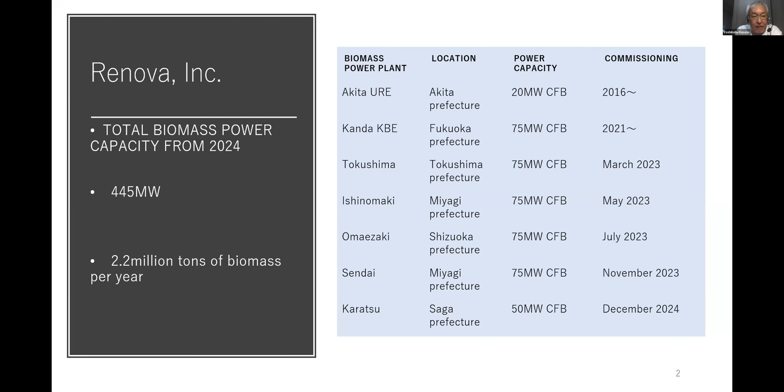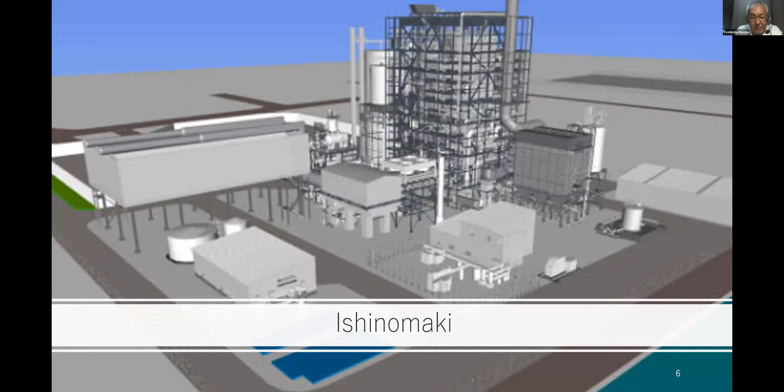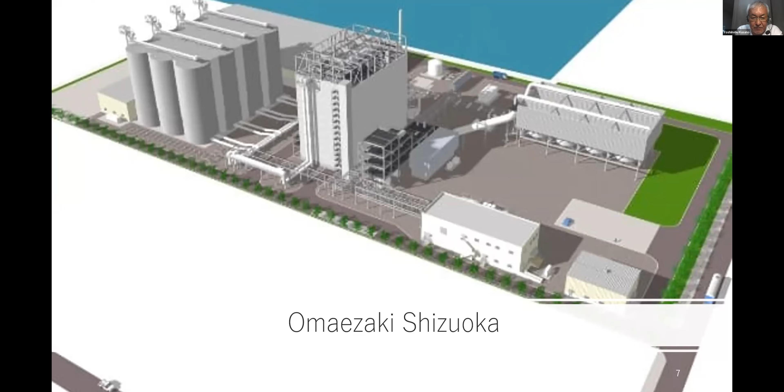This is the picture of Akita. This is the picture of Kanda, 75 megawatts. Tokushima is coming, 75 megawatts, next year. Ishinomaki is coming, 75 megawatts, in 2023, next year. Omaezaki is also coming in Shizuoka Prefecture, 75 megawatts, next year. Sendai is also coming in 2023, 75 megawatts. And Karatsu, this will come at the end of 2024, 50 megawatts. So all these are Renova's dedicated power plants in Japan.

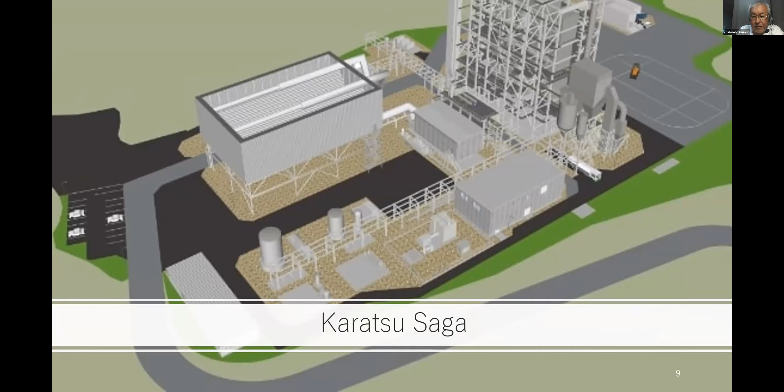Now let's go back to the subject: biomass as a substitute for coal, opportunity in Asia. My conclusion is that opportunity is there. Coal must be replaced as soon as possible. Asia is not only the biomass consuming market, but also the biomass supplying region.

My country, Japan, is a good example. First of all, we have a population of 122 million people. This is about 1/3 of Greater Europe. Based on this, we have a potential of consuming 10 million tons of biomass per year within 2 to 3 years' time. In fact, the consumption of biomass is rapidly growing.

We have two serious issues: decarbonizing power generation to renewable, and decarbonizing heavy industry to biomass. Regarding decarbonizing power generation, we have already done introducing biomass fuel to a satisfactory level. Yet, power generation has other options to go for - solar PV and wind - without consuming biomass.

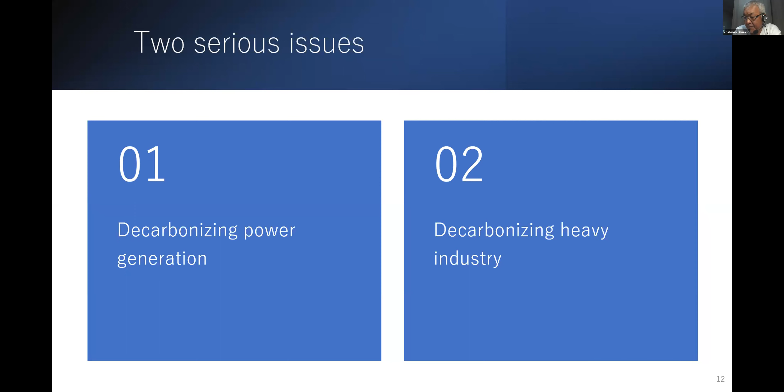Decarbonizing heavy industry to biomass has just started and needs to be focused on, because they have no other options than to go for biomass. The heavy industry uses coal as a fuel; they can only go for biomass if decarbonization is needed. Solar PV and wind power cannot generate heat.

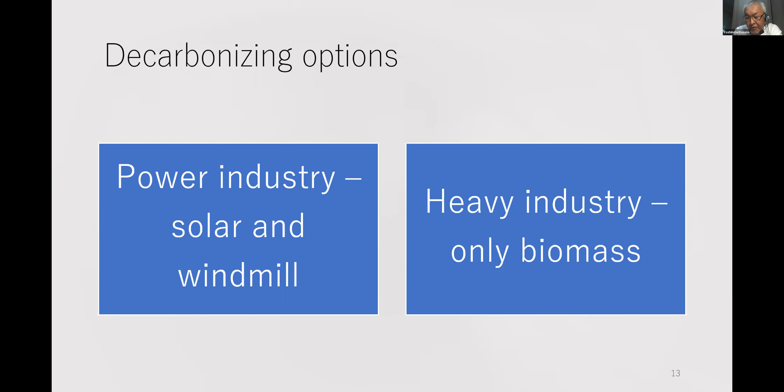Regarding coal consumption, the steel mill is a big user of coal other than power generation. Similar to Europe, they need biomass, and particularly they need carbonized or torrefied biomass, because white pellet or non-treated biomass are too low in calorific value and too soft in some usage, such as a replacement of cokes in the blast furnace process.

Therefore, torrefied biomass or torrefaction technologies are a must to cope with demand from the heavy industry.

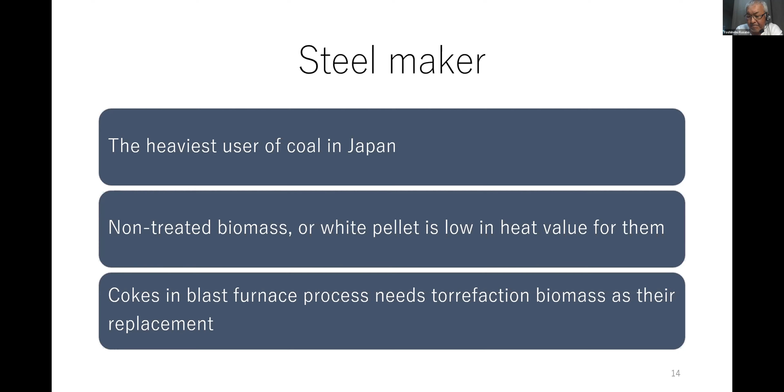Japan is still a heavy user of coal. A revised energy mix announced in 2021 says 19% of power energy source is coal. This is still an ambitious target set by the Japanese government for 2030. We have no declaration of stopping coal usage, while decarbonization is declared by 2050.

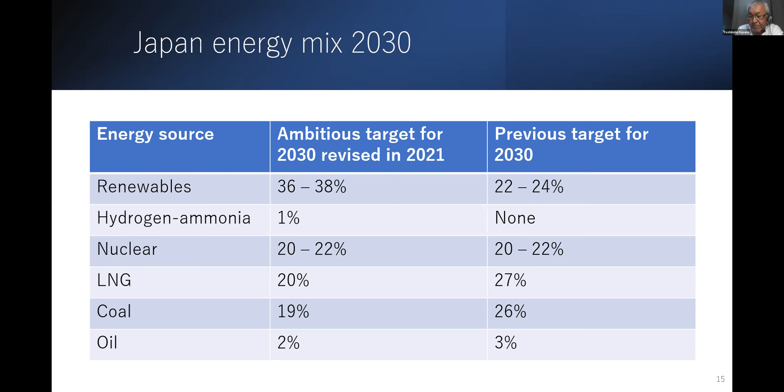In order to be a part of the international market, all industries using coal will make their best effort to reduce coal consumption toward the year 2050. There is an international commitment by the government of a 46% reduction of coal consumption by the year 2030. This becomes the immediate and serious target of the heavy coal user.

So much so, I can say that heavy industry or general industries are much more serious than power generating sectors in terms of renewable energy introduction.

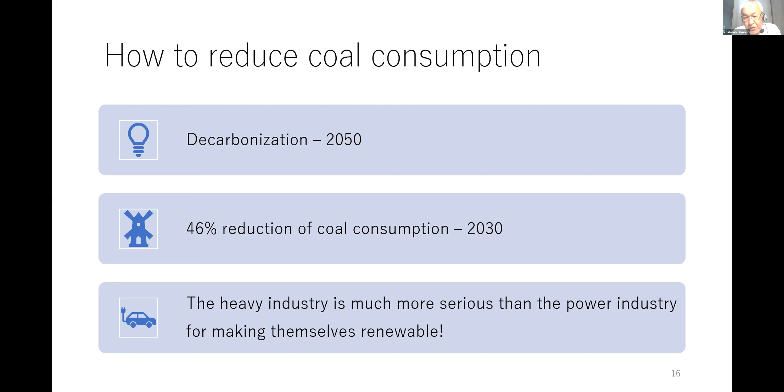Torrefaction technology on biomass needs to be established as quickly as possible. My understanding is that none of the commercial-scale torrefied biomass production facilities are actively running. At least for the last 10 years, several torrefaction technologies have been tested in trial commercial productions, but none of them was successful, as far as I heard.

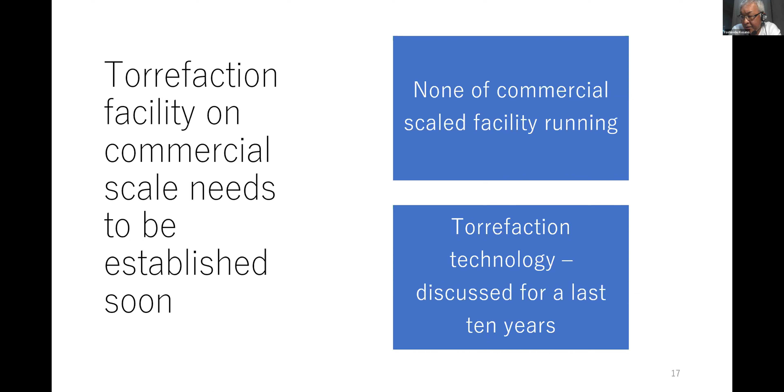Some technology did okay in trial production, but failed to have the same result on commercial scale. They are not successful in commercial scale production and cost competitiveness, compared with white pellet or non-treated biomass. Because of this failure, torrefied biomass is not so popular in Europe, if my understanding is correct.

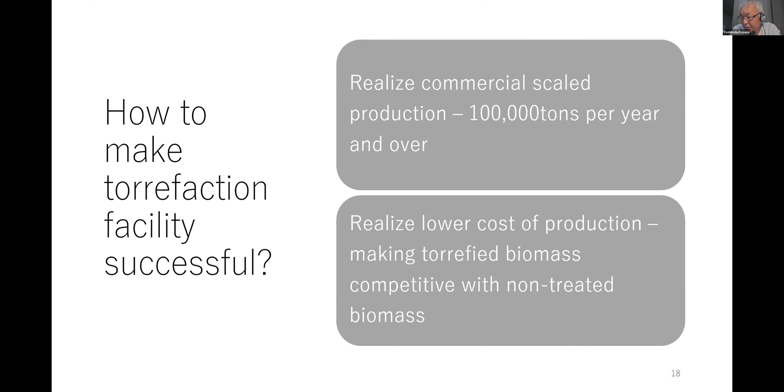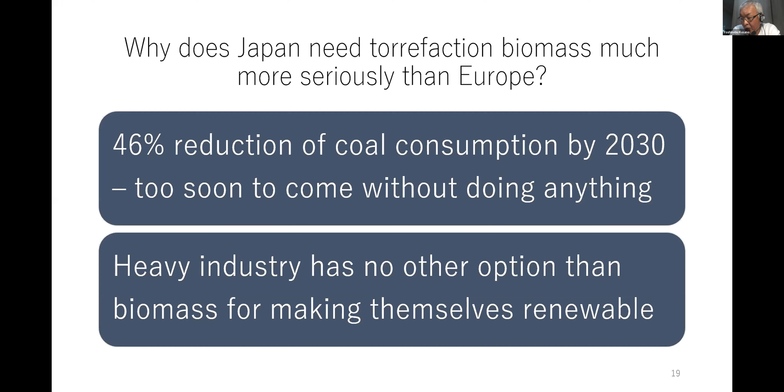However, we are different. We need torrefied biomass much more seriously than Europe. There are two reasons: one, the 46% reduction of coal consumption by 2030, which comes within 7 years' time; number two, there is no other option than going for biomass.

Hydrogen and ammonia got big support from the government, but they are not tomorrow's renewables — maybe 5 to 7 years later. Japan needs biomass replacing coal tomorrow. Biomass should be an intermediate and ideal solution before hydrogen and ammonia come.

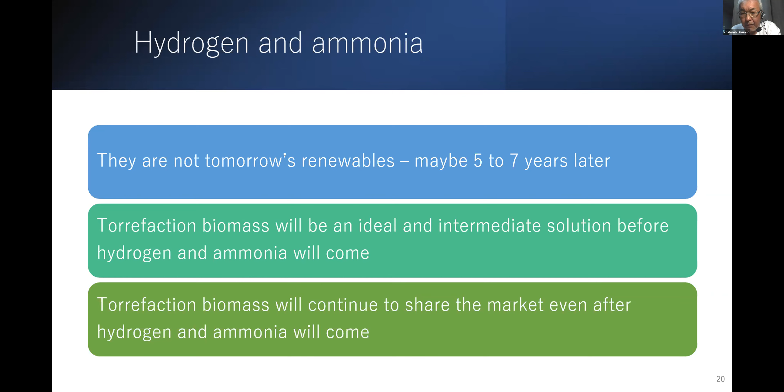Lastly, I will touch on the subject of whether there is biomass available in enough volume to support both industries, power industry and heavy industry. My answer is yes, but we shouldn't stick to wood biomass.

Agricultural waste, such as flax straw, sugarcane bagasse, corn stalks, must be considered. Energy crops, such as sorghum, switchgrass, miscanthus, elephant grass, must be considered.

Some feedstock contains strong chemicals, such as sodium and potassium, with a high percentage of content. The boiler engineers do not want to use such feedstock as it will damage the boiler. But with some technologies, it will turn out to be useful biomass in the future.

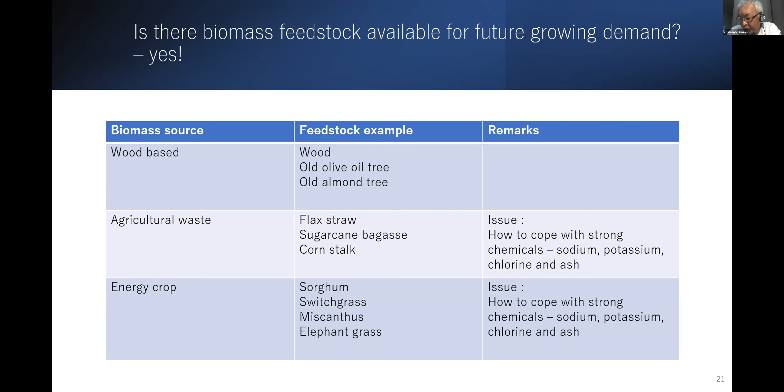This is the end of my presentation. Thank you very much for hearing me. Thank you.

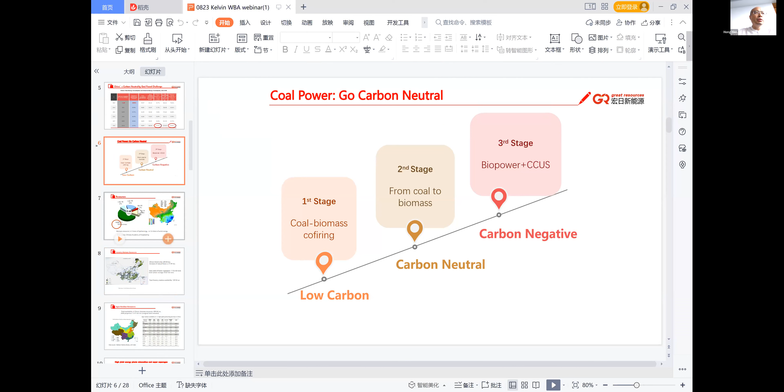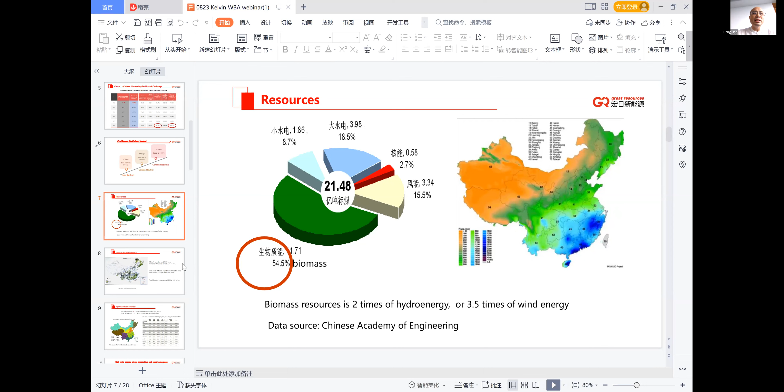When we talk about biomass, first we think about forest residue, forest biomass resources. This is the map showing forest biomass resources in China, and in total we can find as much as more than 8 billion tons of energy.

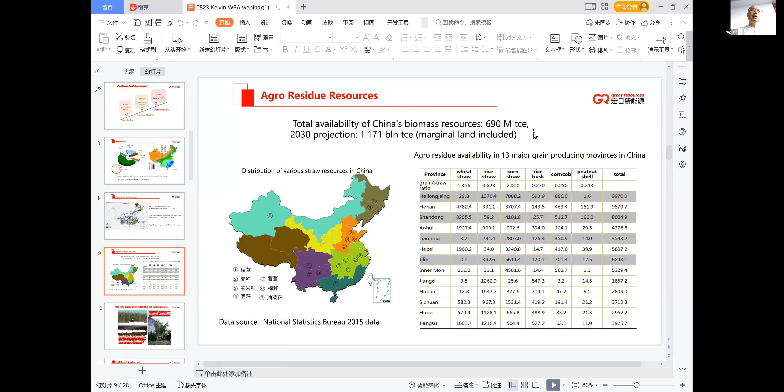This map shows agri-waste in China, including corn, rice, wheat, and any kind of byproducts we can find from agricultural waste - as much as 690 million tons of coal equivalent every year. We also find some places we can plant energy crops, for example elephant grass and miscanthus and so on. So in China, we have enough biomass energy resources we can find.

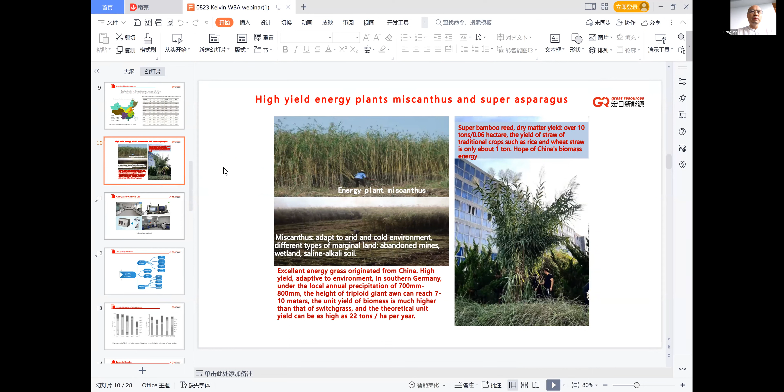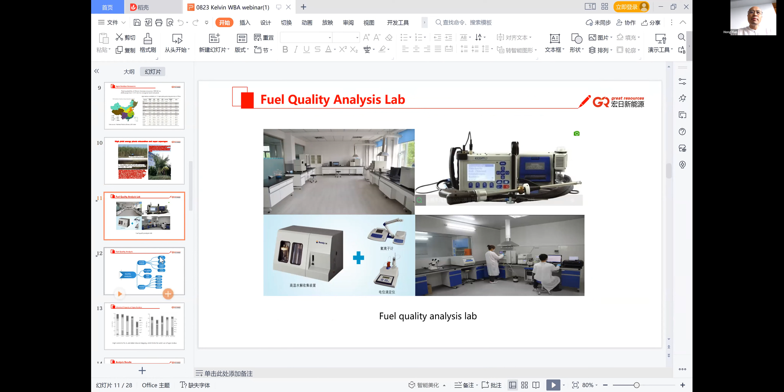When we talk about using biomass, first we have to analyze and check what is inside the biomass - this is quality analysis. We set up the #1 analysis lab in China to check what is inside the biomass, including these parts. Comparing wood-based biomass and agri-based biomass, the difference is the alkali content is quite different.

So when talking about using wood biomass, it will be a little bit easier to use instead of coal. But when talking about using agricultural waste, we have to do something to change the boiler.

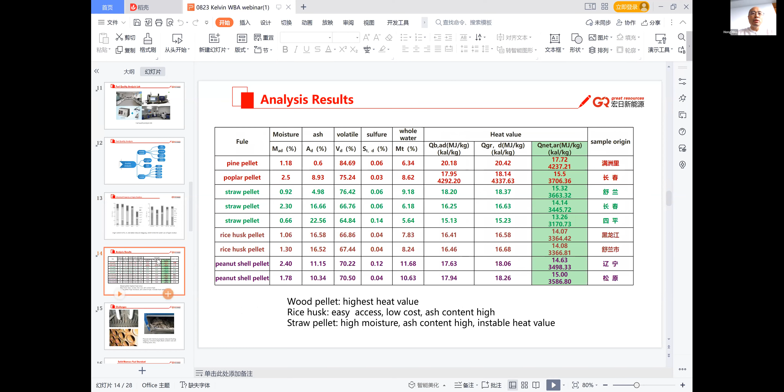This is also another analysis between wood-based and agri-based biomass. This picture shows that if you use agri-based biomass, there will be a lot of challenges we have to solve. For example, the melt temperature of the slag is quite a bit lower compared with wood-based biomass.

And this is a standard we already have in China.

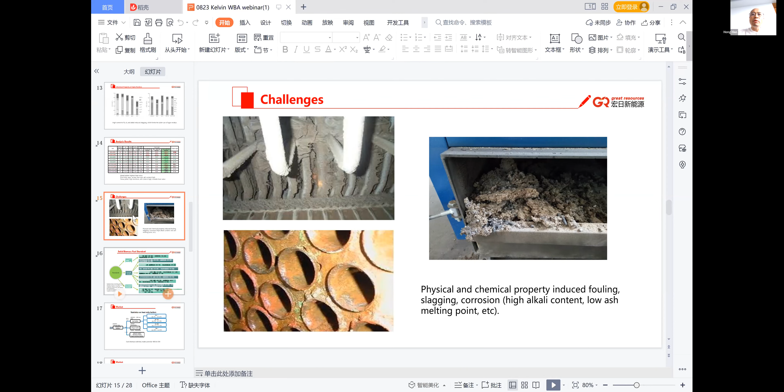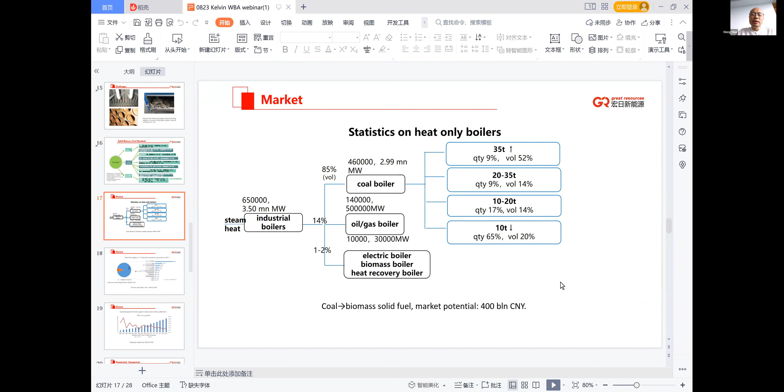And this is the market of whole China. We have more than 650,000 boilers in whole China, including 85% of these boilers as coal-fired boilers. Only 1 to 2% of the boilers are based on biomass. So we have a lot of potential way to go.

Not just industries have energy demand, but also urbanization in China is developing very quickly. So when a person lives in countryside versus living in city, their energy consumption is as much as 4 times different. Since urbanization in China grows so fast, the energy consumption will grow a little bit faster also.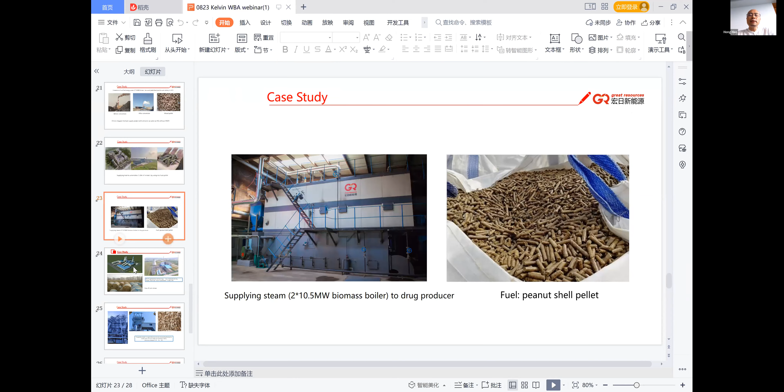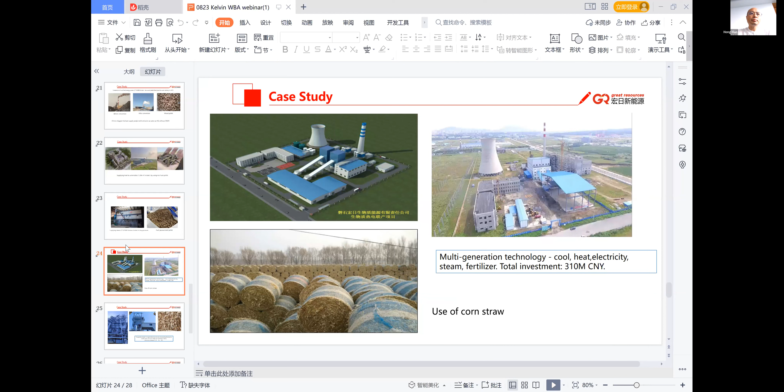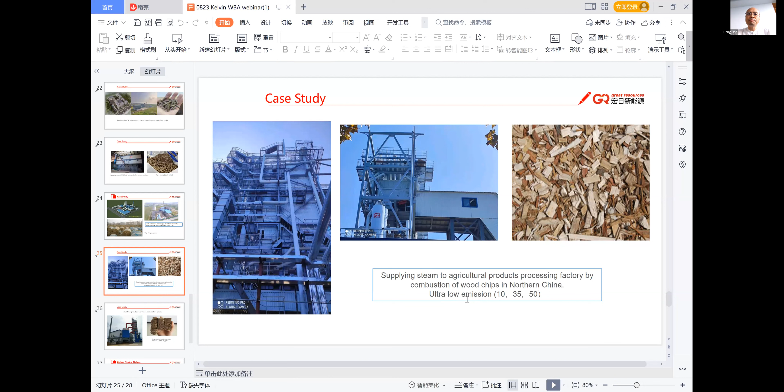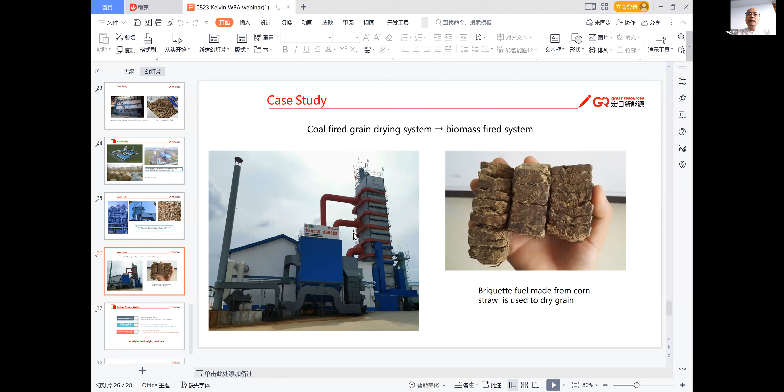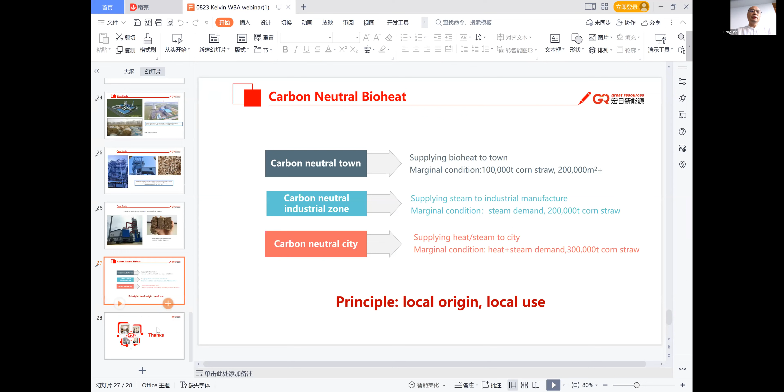So this is my presentation. Thank you very much.

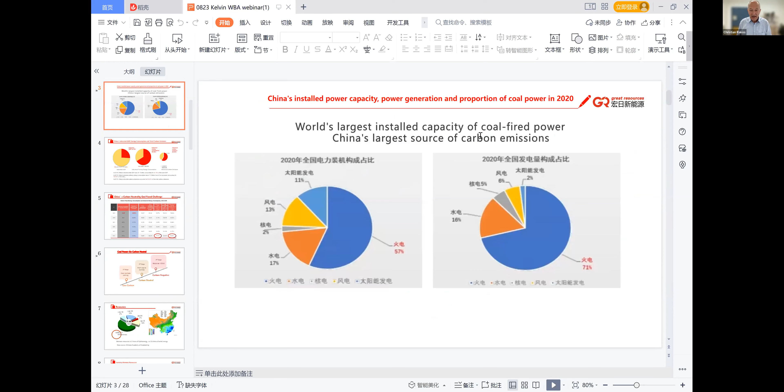Thank you so much, Kelvin. That was extremely interesting and also very important that you're highlighting the role of heat, which seems to be much larger than actually the role of electricity. I could add that in Europe, it's no different. People usually confuse energy with electricity, also policymakers do that usually. But very often it's not about electricity, it is about heat, and biomass is very well suited to supply heat. I should add, in Europe, the by far largest part of biomass that is being used for energy is being used to generate heat at all kinds of different scales.

Hi, can you hear my voice? Yes. Yeah, thank you.

Good morning to European people, and good afternoon to Asian people. Hi, I'm Hinako Yoshida. I work for Hanwa Energy Department. I've been in Hanwa for 3 years, and I'm basically in charge of sales, but I'm also in charge of the sustainability side as well. So I'm going to go ahead and start my presentation.

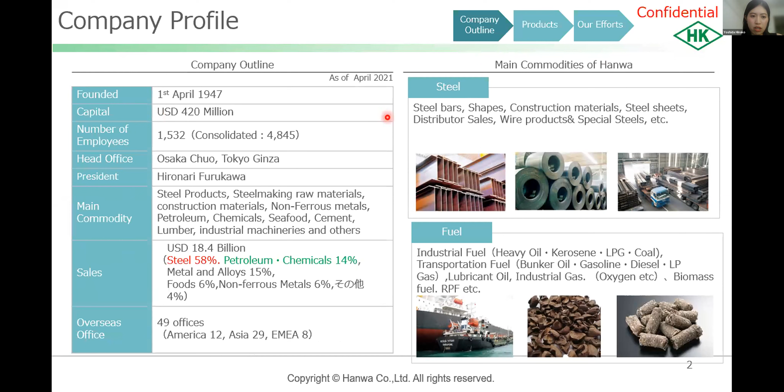This is just a basic company profile. My team belongs to the energy section, but Hanwa as a whole does steel, non-ferrous metal, chemicals, seafood, cement. So we do quite a lot of products actually.

Within our team, what we trade is mainly PKS, which stands for palm kernel shell, and we also do wood pellets. And as Mr. Kusano has introduced, in the future we would also like to trade black pellets as well.

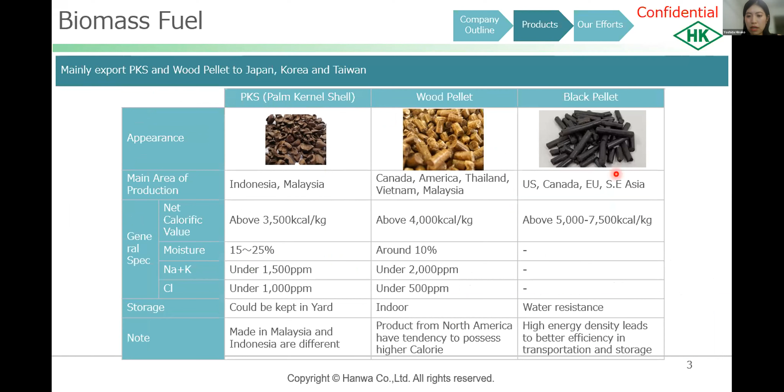I would also like to introduce our team structure. In Japan, we have 10 members. The Japan side is in charge of selling to Japanese companies, and a total manager oversees this team. We also have quite a few other members in Southeast Asia, mainly in Thailand, Indonesia, and Vietnam, and they handle the sourcing side for the PKS and wood pellet.

I would also like to introduce our strengths. When we supply biomass energy, we think stable procurement is very important. That's why in Yamaguchi, Tokuyama, we have a domestic stockpile which can hold about 100,000 tons. When the customer needs PKS in an emergency, we supply via local domestic vessel, which can load about 1,300 metric tons of PKS.

Also, for biomass, we think quality management for the power plant is important as well. So for every shipment, we have a line group where our inspector team goes to the actual loading site and reports to us 24/7.

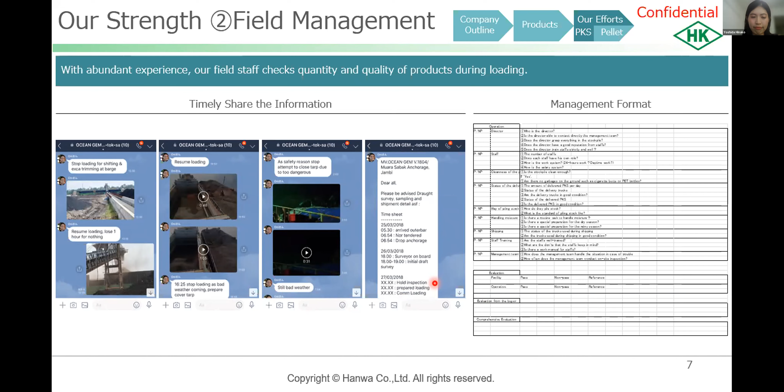For wood pellets, demand is also going to increase. By the end of fiscal year 2025, we think demand will go all the way up to more than 9 million tons. And as the demand grows, our share is also increasing as well.

As for number 3, strengths, we think securing transportation is also important when we want to do stable procurement. So in 2019, we launched our own vessel called Midori, which means green in Japanese. Currently we have this one vessel dedicated to PKS and wood pellets.

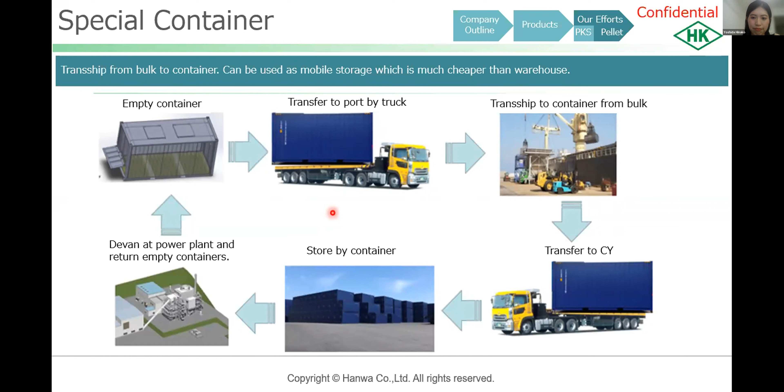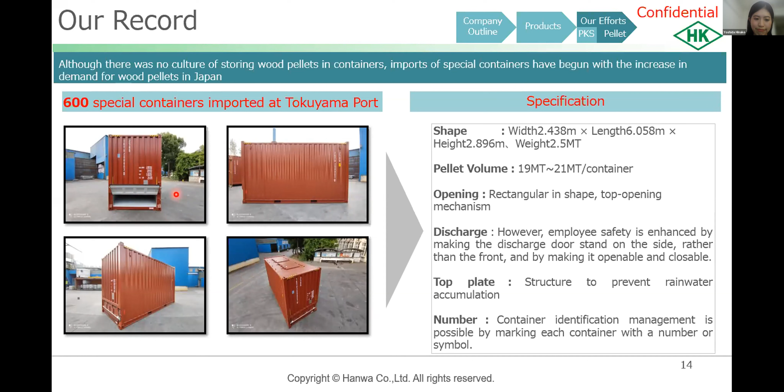That also goes the same for the steel sector. For cement, they're trying to use carbon capture. For the food industry, they're trying to use ammonia. For the chemical industry, they're trying to use hydrogen in order to achieve carbon neutral. But once again, hydrogen and ammonia will take money and also consume a lot of time. So we believe black pellet, torrefied pellet, or carbonized pellet can be a filler to achieve carbon neutral.

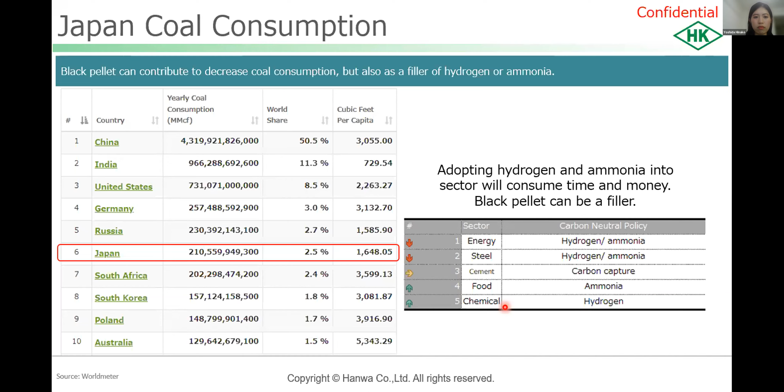So exactly what kind of sectors can apply torrefied pellets or carbonized pellets? We think these two are, I would say, the easiest and fastest sectors that can use black pellets. For power generation, the first category is for FIT. Some of you may know that for a Japanese biomass power plant, they use the FIT system.

For the FIT system, they're given a certain percentage they can use FIT. But when using only white wood pellet, they can only maximize a certain percentage. Let's say one power plant can have a maximum FIT percentage of 40%. But when using only PKS and wood pellets, they can only achieve around 35% or maybe 30% perhaps. So one of the solutions to maximize FIT percentage is using black pellet, which has the same calorific value close to coal.

Another sector we can use is non-FIT, which would just be a simple replacement of coal. Also, one of the biggest sectors is the chemical industry or industry sector. They would need to use biomass or black pellet for CSR because they're so close to the end user. They would need to promote that they are creating products from green energy.

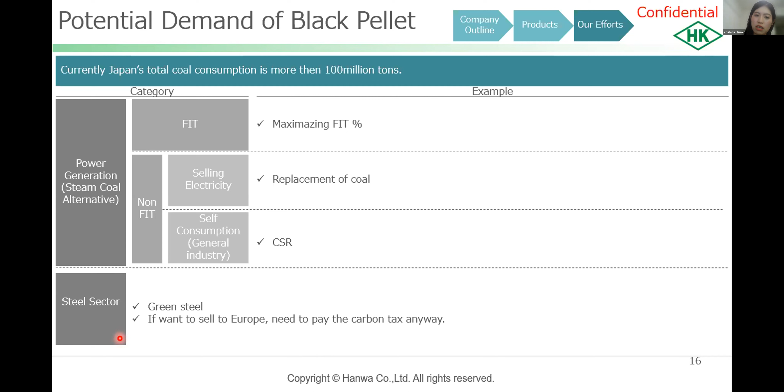But the issue we have right now is that not many suppliers can supply a big amount of black pellet. So we still need to keep thinking about how we can solve the demand for black pellet. And that'll be all for my presentation.

Thank you so much, Mrs. Yoshida. That was very good insight into how a trading house works and how you are handling the growing demand of biomass. There are two interesting questions I'd like to pose to you. One, what about recent sustainability regulations regarding PKS and wood pellet imports, and how does that affect your operation? And another, how do you secure pellet quality as a trading company while managing the product through the supply chain?

On the sustainability side, we think it's not just about the supplier side, it's also important for the end user or trading side as well. That's why Hanwa, about two years ago, hosted a PKS sustainability webinar where we told Japanese customers that we need to raise awareness for certification.

And since then, the Japanese biomass market has boosted increased awareness of PKS certification. As you may know, under Japanese FIT, you need to achieve GGL, RSB, or ISCC certification in order to get the FIT subsidy. So you need certification for the sustainability of your supply chain and biomass, and you'd need to supply certified cargo for PKS, and that's also the same for pellets.

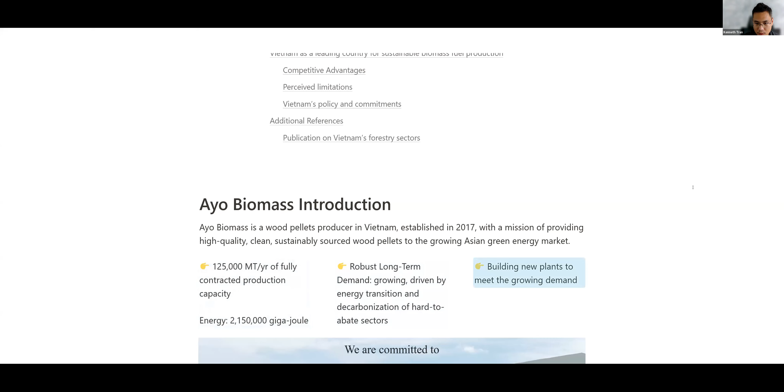As of today, we are building new production facilities to meet the growing demand. As I mentioned, as a company we focus on delivering high quality, sustainable product, meeting the criteria in Japan and also in Europe.

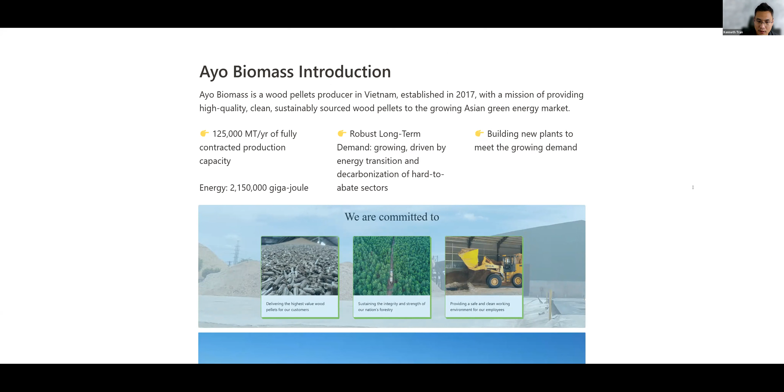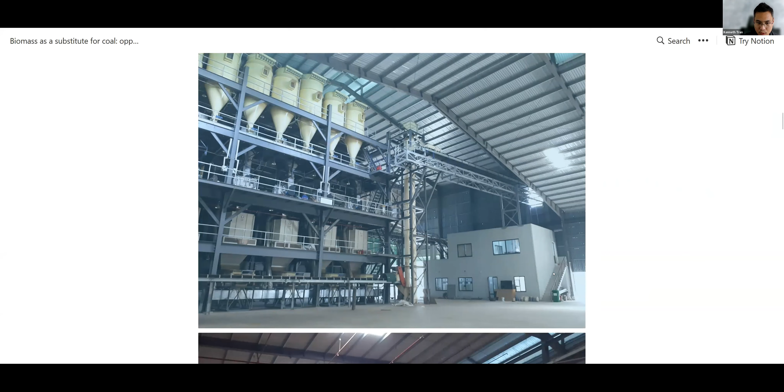Here are a few sample pictures of our facilities. This is our wood material yard. This is the wood pelletization machines, highly automated with a centralized control room, and this is our warehouse for storing wood pellets ready for delivery or export. There are a couple of articles about us on biomassmagazine.com in case you're interested in knowing more about the company.

With that quick introduction about the company, let me switch gears to the technical topics about the challenge to sustainable biomass.

The main thesis for biomass energy as a substitute for coal is that it is renewable and sustainable. The main reason for the sustainability and carbon neutrality of biomass is that when you burn wood pellets or biomass, it does release CO2 to the atmosphere. So the energy itself is not carbon neutral, but the thesis is that the carbon it releases to the atmosphere should equal or be less than the carbon that the forest and trees absorb. Because of that complex sustainability thesis, biomass energy by itself is not considered renewable or sustainable.

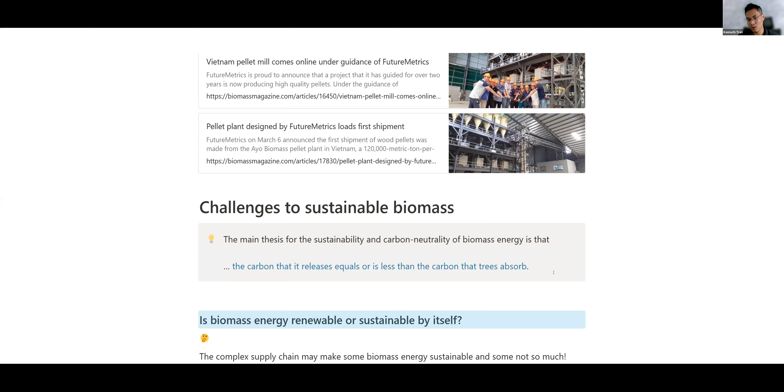It requires complex management of the supply chain and carbon accounting to make it sustainable. The supply chain may make some biomass energy sustainable and some not so much. So whether it can substitute coal effectively or not, we need to look at the whole supply chain.

A little bit more technical: I would like to argue that in our opinion, there are three layers of challenge for the sustainability of biomass energy. Number one is what I call the green growth challenge. If you look back to the underlying thesis of biomass energy, we need to ask: can we ensure that the new trees we try to grow for biomass energy grow faster than the consumption of wood or agricultural waste for making the pellets?

The second challenge is the ecosystem. In the regions that produce biomass, does it have a healthy ecosystem? In this presentation, because we produce wood pellets, my focus is woody biomass centric. So the question is, does the supply base have a healthy wood ecosystem? For example, does it have a healthy lumber industry? Does it have a healthy furniture industry? To ensure that the trees we grow are not just for burning, the majority of the trees should be used to make wooden products that can capture the carbon.

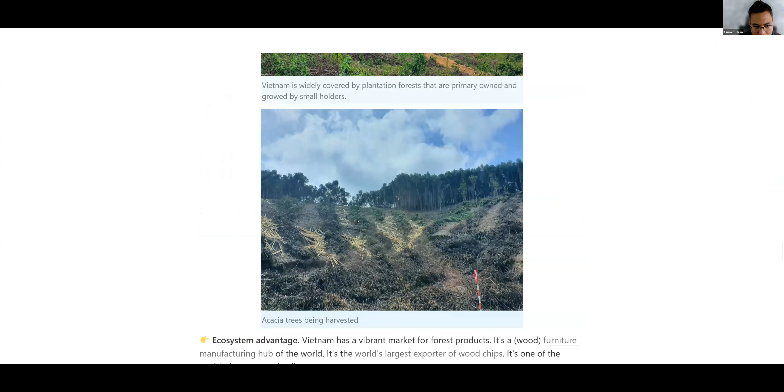The second advantage that Vietnam has is the wood-based economy, what I call the ecosystem. Vietnam currently has a vibrant market for forestry products. It is one of the global furniture manufacturing hubs in the world. Thinking of all the countries with a climate similar to Vietnam, only Vietnam has the furniture manufacturing advantage to ensure most trees will be used for manufacturing, for lumber products. It's also the world's largest wood chip exporter. So Vietnam has a very healthy and vibrant wood-based ecosystem.